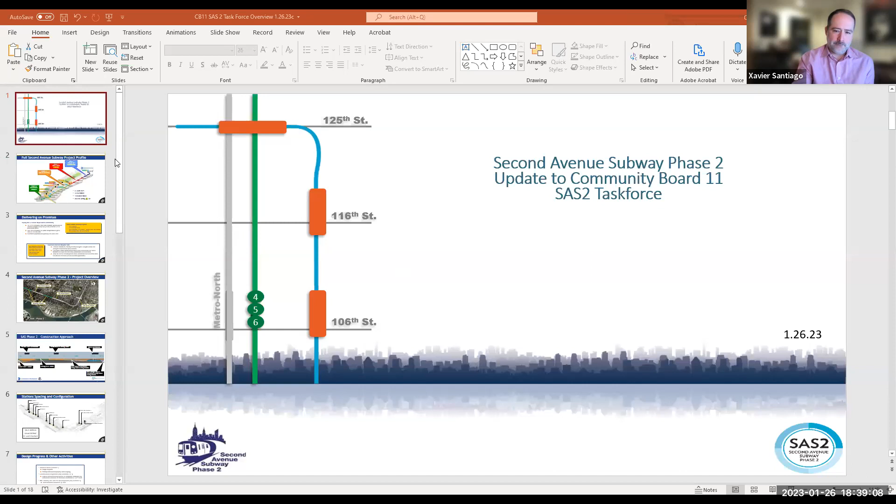All 4 phases of the Second Avenue Subway probably will not be completed in my lifetime, so hopefully we get Phase 2 underway and going before we contemplate moving on to 3 and 4.

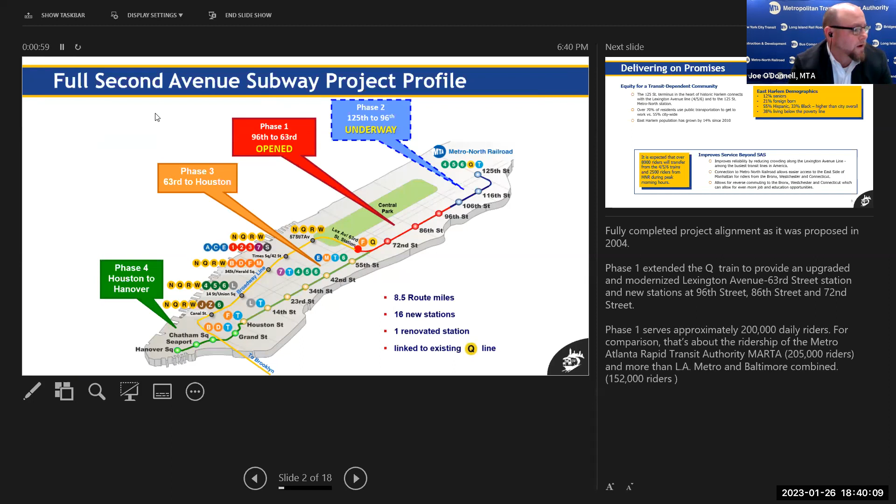This is a project that delivers on promises that were in place since the El was taken out of service, the Second and Third Avenue Els. This is an area that is in desperate need of mass transit options.

Over 70% of the residents use public transportation to get to work, as opposed to 55% citywide. And East Harlem's population growth has grown by 14% since 2010.

It's a little snapshot of demographics: 12% seniors, 21% foreign-born, 55% Hispanic, 33% Black, all of which are higher than the city overall, and 38% living below the poverty line.

We're anticipating that over 8,000 riders will transfer from the 4, 5, 6, eliminating overcrowding on the Lex line, and there will be 2,500 riders transferring from the 125th Street Metro North Station to the new Q service once it's up and operational.

There will be new stations at 106th Street, 116th Street, and 125th Street. You can see here there are existing tunnels that were bored and excavated in the 1970s.

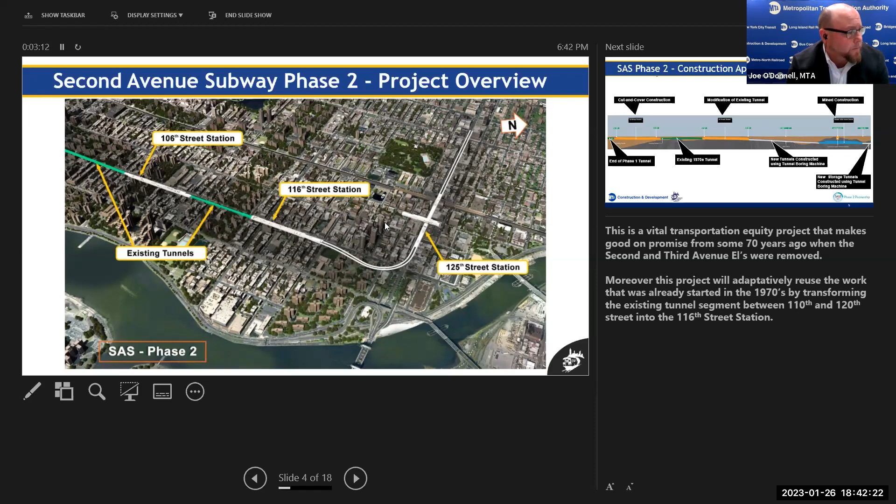The construction approach for this project will be largely 2 different means and methods. One will be cut and cover, and the other will be mined tunneling. At the end of Phase 1, we will be connecting from some of that existing 70s tunnel to the 106th Street station. That'll be a cut and cover construction operation.

What that means is we're going to be working from the street level down, excavating as we go in order to meet up with the existing terminus, or the end of the tail tracks for Phase 1, and then being able to connect it to the existing 1970s-era tunnels before moving on to the 116th Street station, where we will turn the northern portion of those existing 70s-era tunnels into the station itself.

So as I say, it's a great starter hole. It's a benefit for us that that's there already. And it's also going to be an adaptive reuse, so that the money that was spent back in the 70s on those tunnels, we're going to retrofit them and turn them into the 116th Street station.

From that point north, and then ultimately west on 125th Street, we will excavate to put in a tunnel boring machine, which will run underground and excavate or mine new tunnels from approximately 120th Street to 124th Street, where it'll start to turn west, connecting with 125th Street, and then going all the way on to Lenox Avenue with tail tracks and an ancillary.

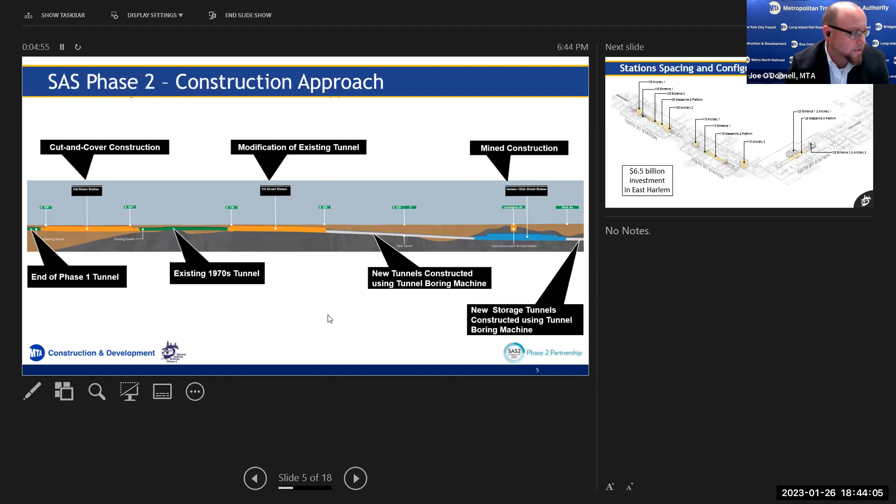The configuration of our stations, despite the fact that there will be 3 separate and distinct stations, are relatively the same. There will be ancillaries at the northern and southern terminuses on Second Avenue, east and west on the 125th Street station. These ancillary structures not only provide ventilation and air to flow in and out of the station and the tunnels, but also provide power and back-of-house services for the operation of the subway.

As I mentioned, there will be stations and ancillary structures at 106th, 116th, and 125th Street. These 3 new stations represent a $6.5 billion investment in East Harlem.

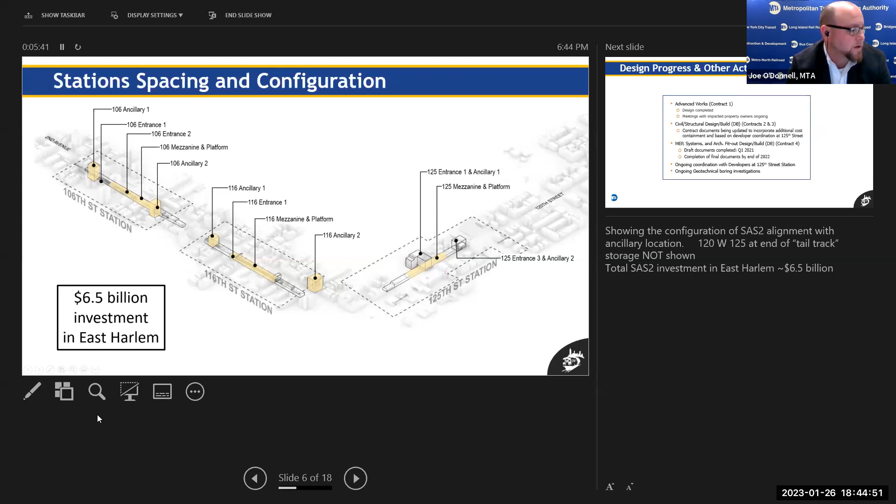From a design standpoint, we are 100% designed for contract 1. Contract 1 will be to relocate the utilities on Second Avenue from 106th to 116th Street. That's the first contract that we would look to get going.

One of the things we learned from Second Avenue Subway Phase 1 and other major projects like this is our information is largely only as good as the drawings we have from our sister agencies, and sometimes those drawings don't match what we find once we start to excavate. So to avoid problems and minimize those curveballs as we get below ground, we're going to get in there early. The first thing we'll do is move those utilities from Second Avenue proper off to the side, east and west, in order to eventually build the subway.

There will be follow-on contracts 2 and 3, which is the heavy civil element of the project, and then eventually contract 4, which is the mechanical, electrical, and plumbing - basically the systems. Contracts 2, 3 and 4 are design build contracts. As I said, contract 1 is fully designed already, so that'll be a design bid build contract.

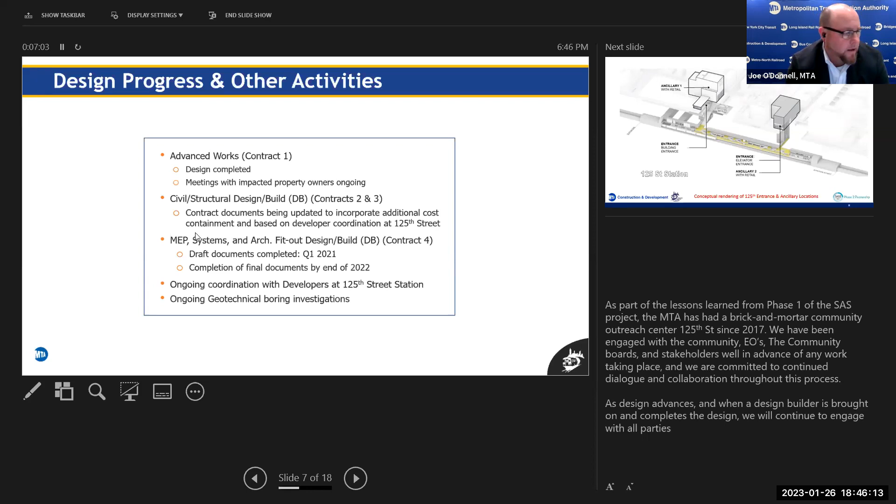Just to give you a sense of what we've been doing more recently, we've been out and about. We've met with Community Board 11 several times, most recently about the ancillary and entrance 1 section at 125th and Lex, where the Extell development is right now.

We recently came to Community Board 11 to discuss increasing the easement volume on the Extell parcel in an effort to advance their project. Extell had previously come to Community Board 11 and City Planning with a placeholder volume, which was not substantial enough to capture all of what Second Avenue Subway needed, but they needed to have a placeholder for our project in there. So we came back to the community board to present an update on what that new volume will look like.

Previous to that, we had met about the entrance and ancillary structure at 125th and Park, proximate to the Metro North Station and the viaduct there, to talk about the disposition of the HPD parcels. That area, on both the east and west side of the viaduct, was presently owned by the Durst organization. We purchased two parcels from the Durst organization and then worked out an agreement with New York City to transfer the HPD parcels to the MTA in exchange for land elsewhere for the city.

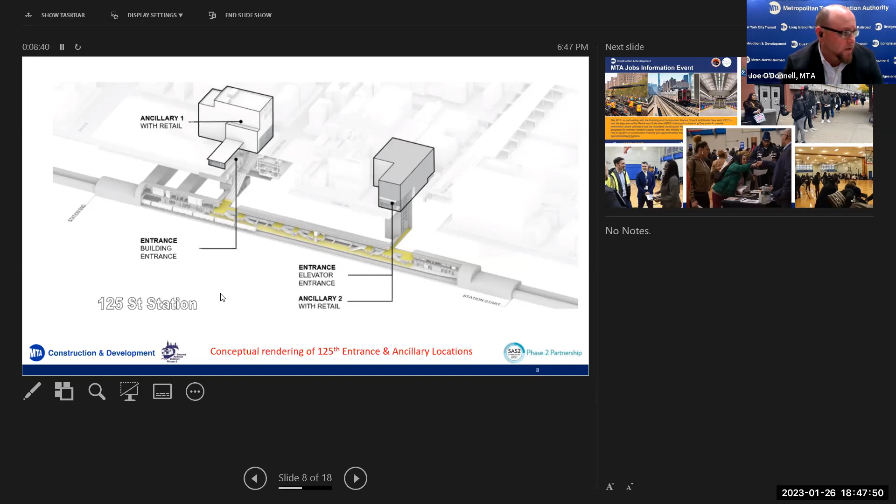We've also been out and about in the community, conducting our second jobs event. We had a very successful jobs event here in East Harlem in 2019. This jobs event was held in 2022 and combined two projects - we also have the Park Avenue Viaduct project, which will take place from 115th Street to 123rd Street on Park Avenue. So we joined forces to hold another jobs event at the Tito Puente Educational Complex. Very successful event - our second event coming out of the COVID malaise. We were pleasantly surprised to see over 200 people come out to get information about direct entry programs into unionized labor, apprenticeship programs, as well as civil service opportunities with the MTA, DOB, New York City Fire Department, and NYPD.

We've also been engaged, not only with Community Board 11, but with We Act, Uptown Grand Central, and our elected partners. We contracted with WXY, a renowned design firm, to engage in a public visioning exercise with the goal of advancing - this is not a new concept. We've heard from participation in visioning exercises in the past with the community board as well as We Act, that the public is interested in seeing a grander vision, especially around the 125th Street and Park Avenue convergence of the transit hub with Metro North, buses, as well as the future Second Avenue subway.

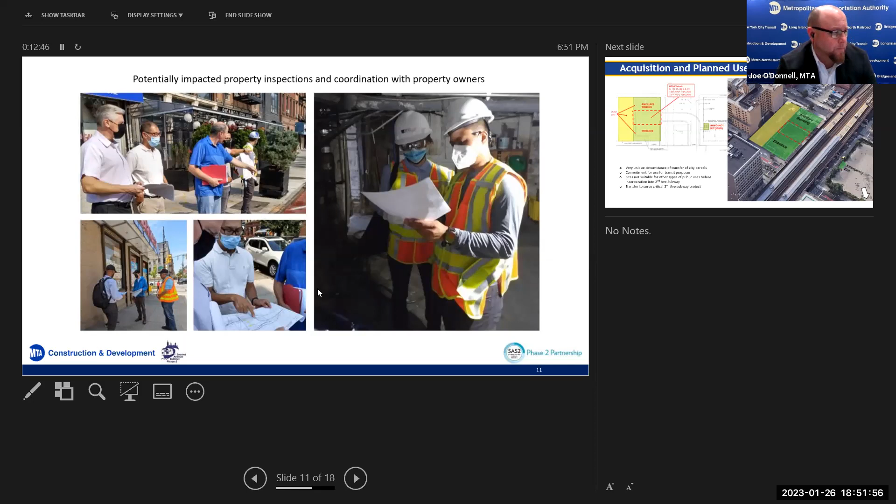Our engineering team and community outreach team, Hector and his crew, have been out meeting with businesses and residents identified as potentially impacted, either from a property acquisition standpoint or a construction standpoint, to give them a heads up on what's to come and to investigate what may or may not need to be done to execute this project safely.

I mentioned the HPD conversation we had with Community Board 11 and the City Planning Department. This is the area just east of the Metro North Viaduct, at 125th Street. This was former Durst property, all of it except the area outlined in red. We acquired the 124th Street parcel and the 125th Street parcel in agreement with the Durst Organization, and then the parcel in red was one we ultimately agreed with the city to transfer to the MTA.

Because of its location in the center of this U or C-shaped Durst parcel, these HPD parcels were not suitable for other types of public use before incorporating them into the Second Avenue Subway, so there was no major impact from the transfer of this property.

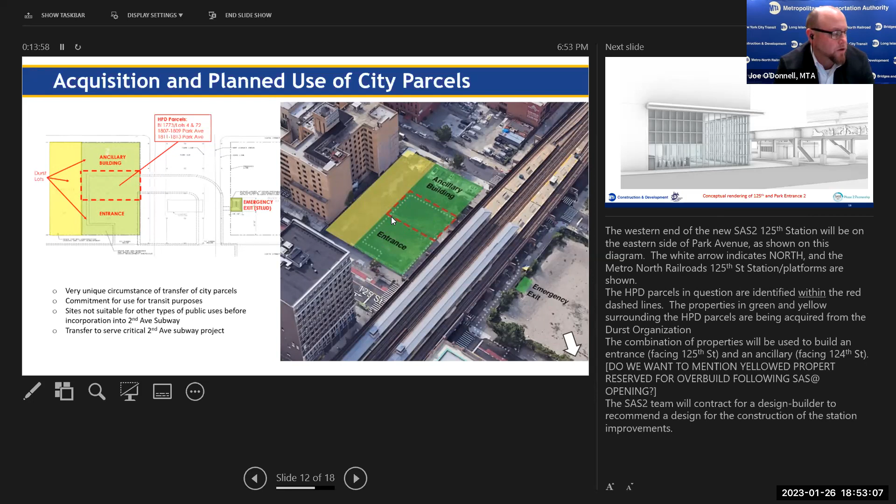One of the things we've heard a lot about in our conversations with folks is a desire for a larger presence. This is a rendering, conceptual in nature, of what something at 125th and Park could look like—similar to what the Dey Street head house looks like downtown.

One thing we've heard is that folks in this community, East Harlemites, would like to see a grander entryway, not just a simple entry staircase. The entryway at 125th and Park will be primarily an elevator entrance, so there will be a large capacity entrance to accommodate all of those elevators.

As we progress in design, the thought is there would be some programmable retail and, based on conversations with the community at large, some community space. We don't know what that would look like yet, but there are ongoing talks with Congressman Espaillat, Community Board 11, and Uptown Grand Central about what that could look like.

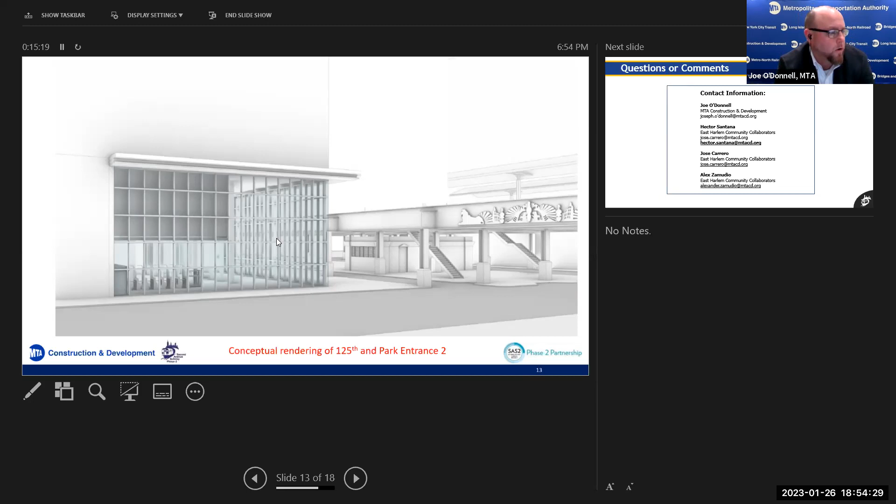For those who may not know me, you have my contact information and email here, as well as Hector's information. The rest of our community outreach team includes Jose Carrero, also an East Harlemite and well known to many of you, and Alex Zamudio, a holdover from our Phase 1 team with a wealth of institutional knowledge from how we did business during Phase 1—we were fortunate to retain him for Phase 2.

All of our folks are based out of the Community Information Center at 69 East 125th Street. If you haven't been over there, I urge you to stop by and say hello and see some of the information we have. Unfortunately, we did incur a couple of incidents during COVID when we were not operational there.

We had a flooding incident due to a burst pipe in an adjacent building, and a robbery. So we put all of our pieces back together, and we're about 90% there. Our folks are staffed there every day, Monday through Friday, so we'd be happy to see you and have you stop by and ask any questions.